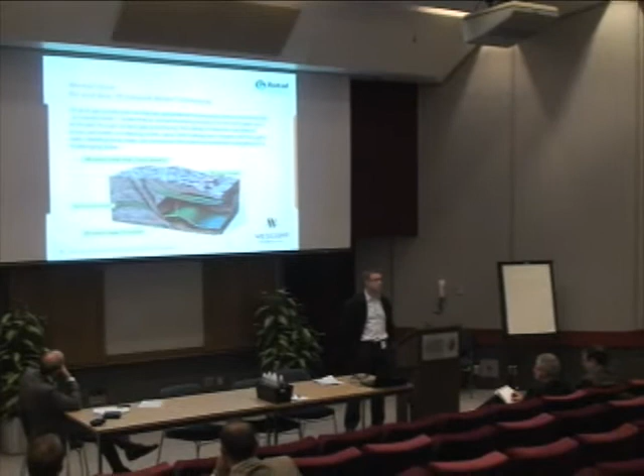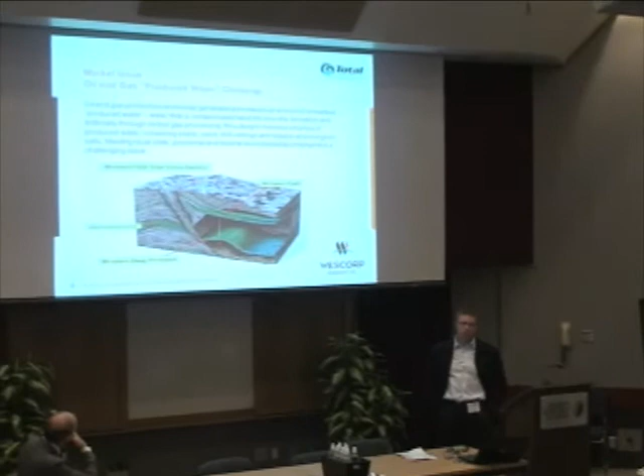So, I'll just go here. The market that we're going after, Wescorp's, this company is called Total Fluid Solutions. We acquired the patent for this technology. It's a mechanical process; it'll be 2 years in December. And what it's focused on is to help solve some of the problems in the produced water market. The produced water market is larger than the oil market itself. Many of the oil companies out there see themselves really as water producers versus oil producers. And wherever there is oil or gas, there's water. The byproduct's called produced water.

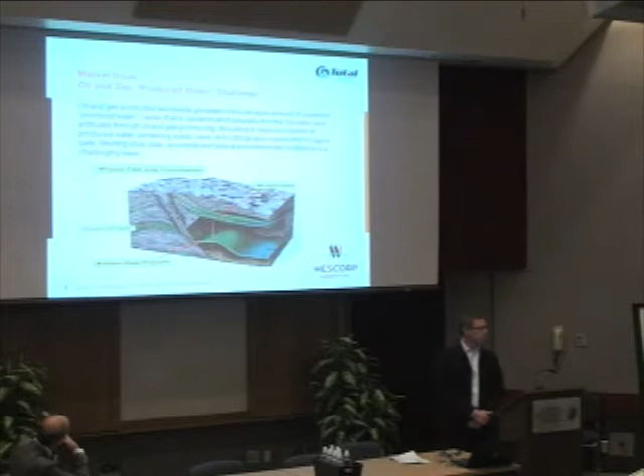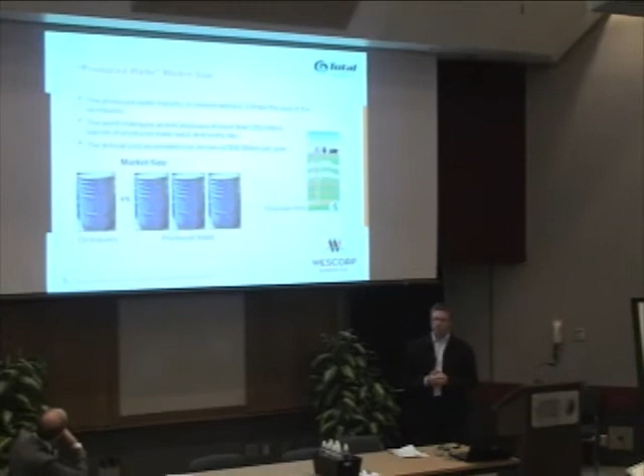And David, you would know that from up in being from Syncrude. Size of the market is 3 times the size. Currently, the world produces and consumes about 90 million barrels of oil a day, and it produces in excess of 250 million barrels of produced water. So it's a very, very, very large market.

And in that market, there's very large competitors, companies like Zenon and Siemens. You've got Veolia. There's lots of different players in the market today, and there's a variety of different technologies in the market today to help the producers deal with their produced water market. We believe that we have a technology that we have proven in the market. We've worked with the Alberta Research Council. We've worked with University of Calgary. We've worked with Olds College. We've worked with PTAC. And we have proven our patented technology to work in helping to remove hydrocarbons from the produced water.

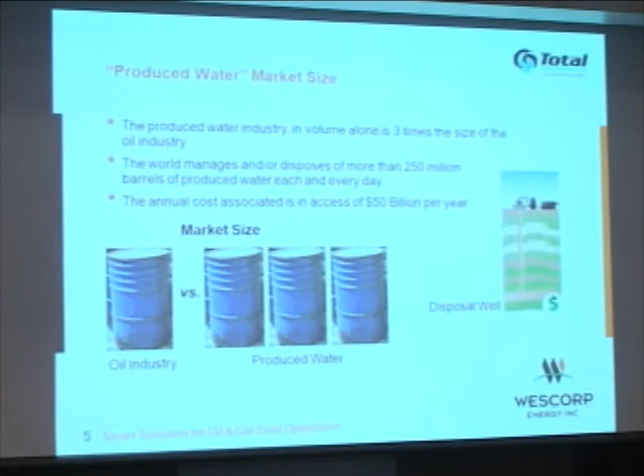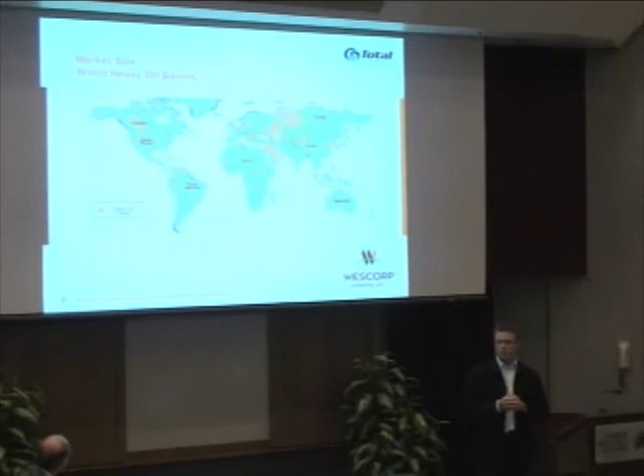Again, the size of the market, it's global. Wherever there's oil, there's water. It doesn't make a difference where you're producing, whether it's shallow or deep, on land, off land, offshore, there's always water to deal with.

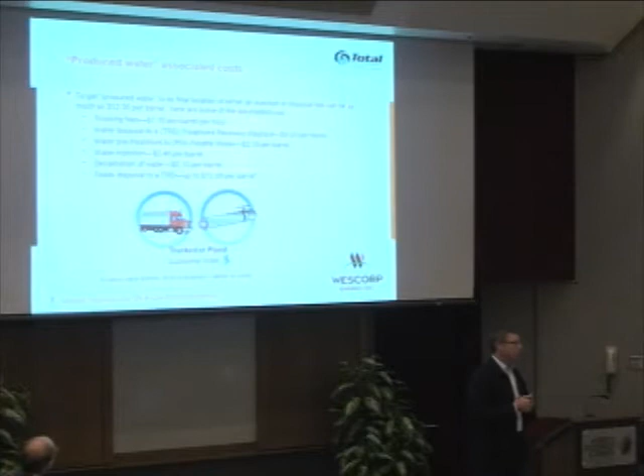Why are we in the market? We think that there's huge opportunities for us to help cut some of the operational expenses in the market itself. And many producers will tell you on average that they could spend as high as $12 per barrel of oil to deal with their produced water. Produced water is in the formation. It's typically very heavily saline, 3 to 4 times, maybe even 10 times more saline than seawater.

And those producers have really got 2 options to deal with that water. They can either dispose of it down a disposal well, many of you have heard of a disposal well, or they take that water and re-inject it back into the formation and re-stimulate oil or gas production. On an offshore application, there's government regulations. If they can get the water down to specific parts per million, they can discharge that water into the open sea. But in most cases, they're actually processing or transporting that water to land and processing the water on land.

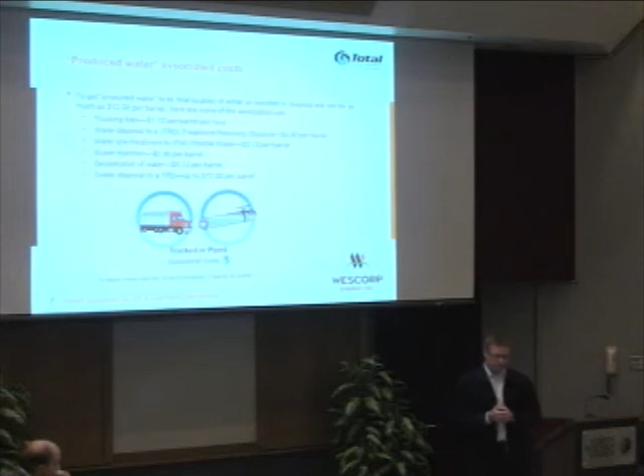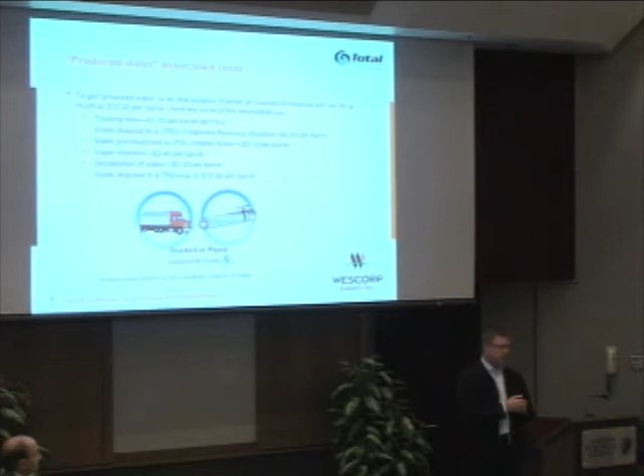Huge market, huge, huge market. The points in here speak a little bit about some of the costs that are associated with the produced water market itself. The very last one is called treatment, recovery, disposal. That's a third-party waste company. Some small producers end up having to take their water to a third-party handler, and the cost can be extremely high in that area. So what do we do?

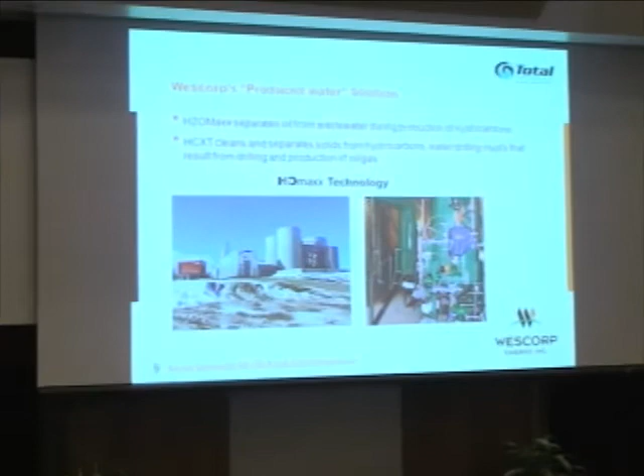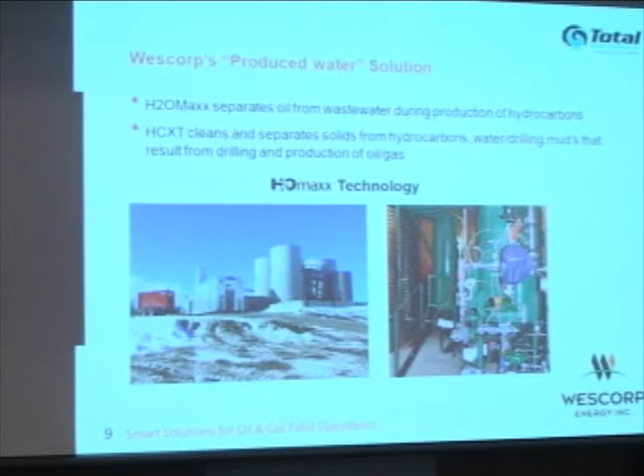The picture on the left is a beautiful Canadian winter shot. That's actually our unit, the silver building there, that's our unit. We have a mechanical process that is fully scalable, it's patented, it's a patent process. And that is actually at a site just west of the city of Edmonton here at an EOG facility. Just actually Highvale is where it was. And that facility had 120 well production facilities.

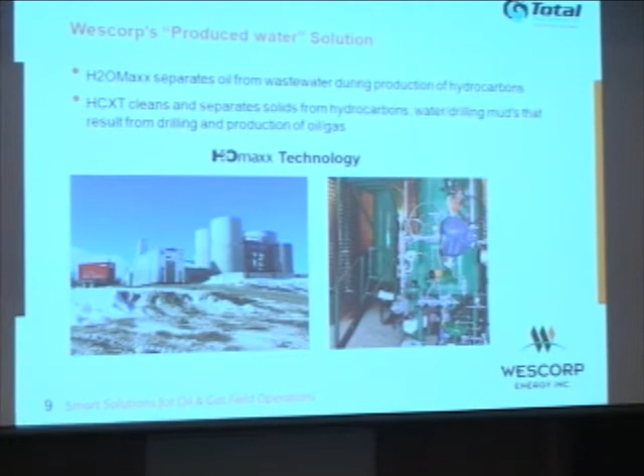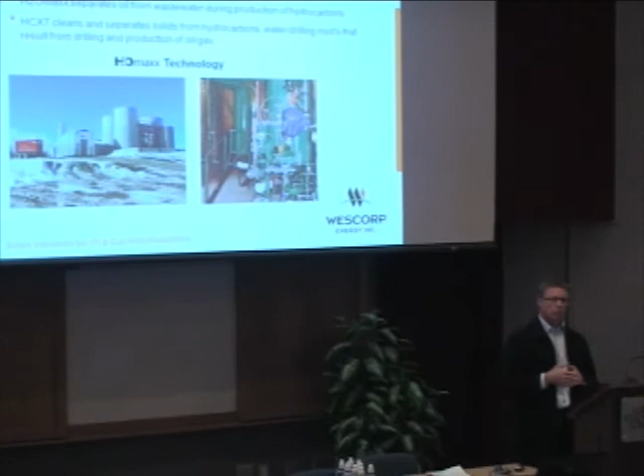Plant was about 30 years old, and we were taking the water stream from those silver tanks, which they would normally take that water. They had a free water knockout system. They would put the water, retain it in the tanks, and then inject it down the disposal wells, and they were running into a high degree of costs associated with disposing of that water.

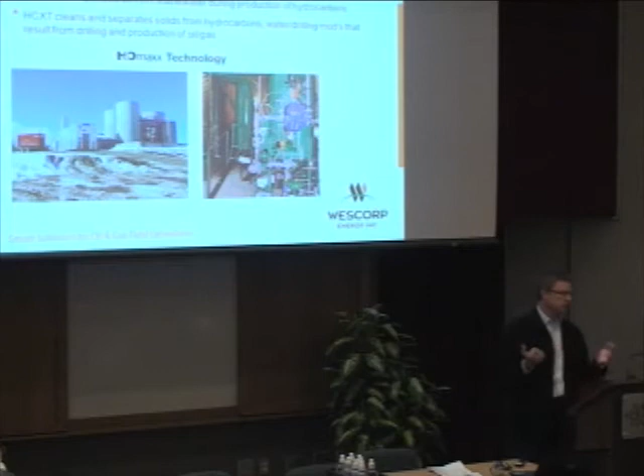That came in the form of power consumption by driving bigger triplex pumps to force the fluid down. It came in the operational costs, labor components. They used filtration, down to 2, 3, or 400 micron filters, and they were continually having to change the filters. So it's a cost issue for that specific producer.

The other side is you may have heard of well workovers or frac jobs in the oil industry. A well workover is taking a disposal well that's actually now clogged and sending in a workover crew to come in and acidize or clean that well out so it can now take more fluid. Those costs could be $50,000, $60,000 per service incident to do a well workover. And it could happen annually, it could happen biannually.

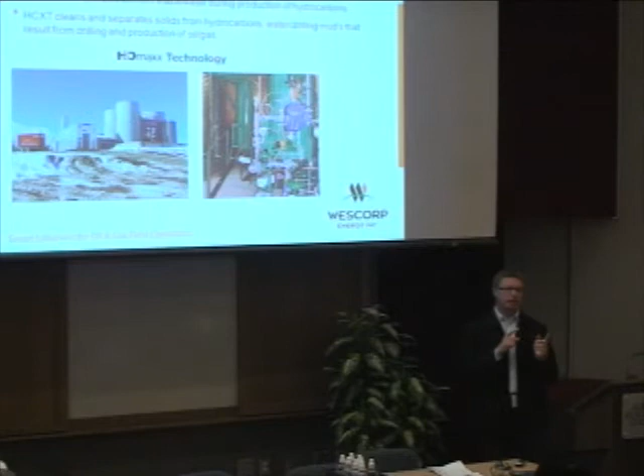But the key is that what we do is we provide the producer with water that is hydrocarbon free. If you take the analogy of salad dressing, which is oil and vinegar, and you pour it down your drain at home continually, eventually you're going to end up calling in the plumber to clean out your drain. Principally that's what happens when the producer puts his produced water back into the formation laden with hydrocarbons. He creates a clogging effect in the wellbore, and a lack of production in his formation itself. So that's what we do.

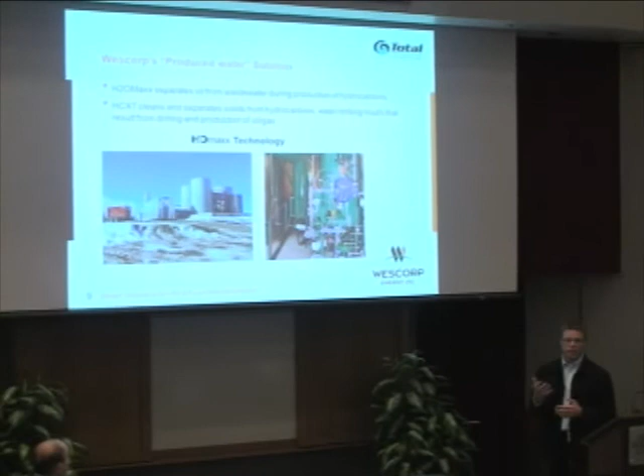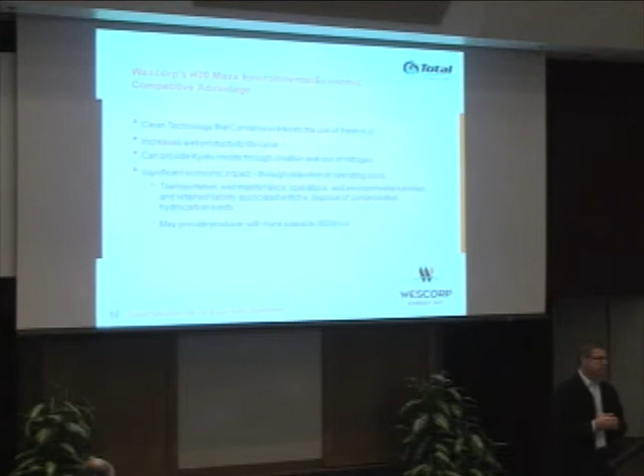The unit is scalable, and the picture on the right here is showing the inner workings of it. It's a mechanical process. We achieve the separation through using nano or micro technology, through creating a micronic bubble in the fluid stream. So principally, the science creates the separation. The technology can be very massive.

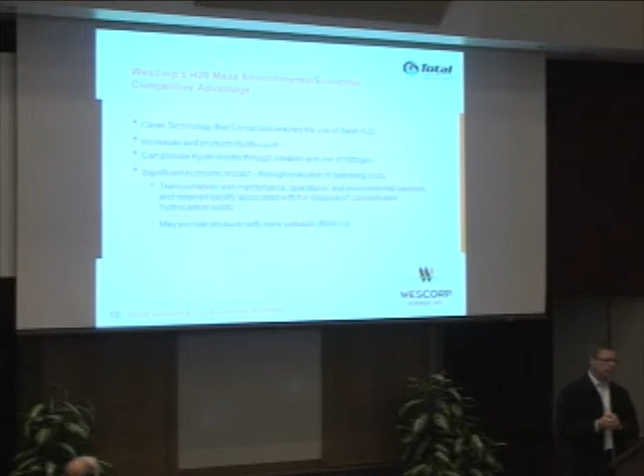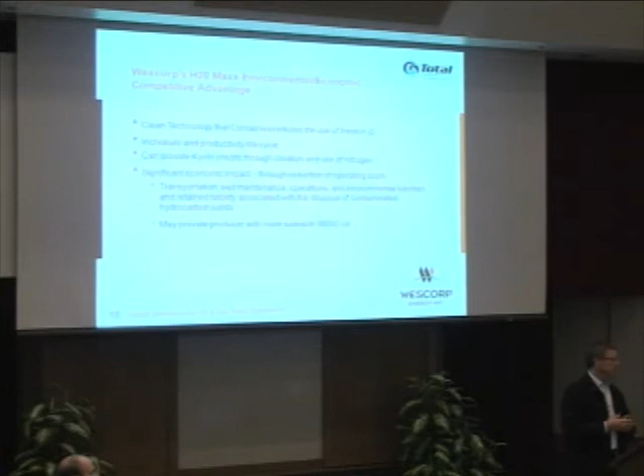I met last week with the people in Calgary at Apache. They were telling me about a situation they have in the North Sea where they're producing 80,000 barrels of oil off 4 production facilities, and they're producing 800,000 barrels of water. So their cost, just even to process the water, is massive. And so they were asking us how does our process work?

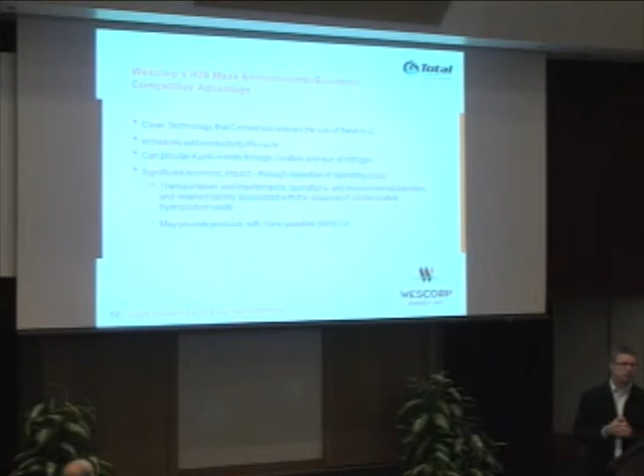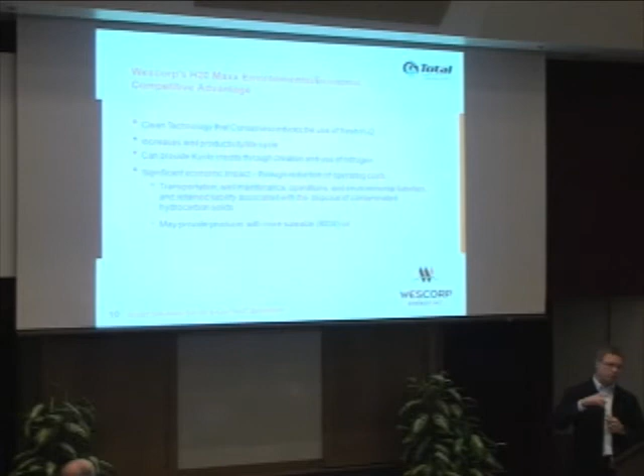We create the separation through using a distributed airflow, a micronic bubble in our technology, and a centrifugal approach. So basically, we introduce the fluid into the tank, we spin it, we add a distributed airflow, and the small micronic bubble attaches to the oil droplet in the fluid and creates it to lift, creating a separation. We also can separate solids, sediments, and silts as well in our process, up to a certain degree.

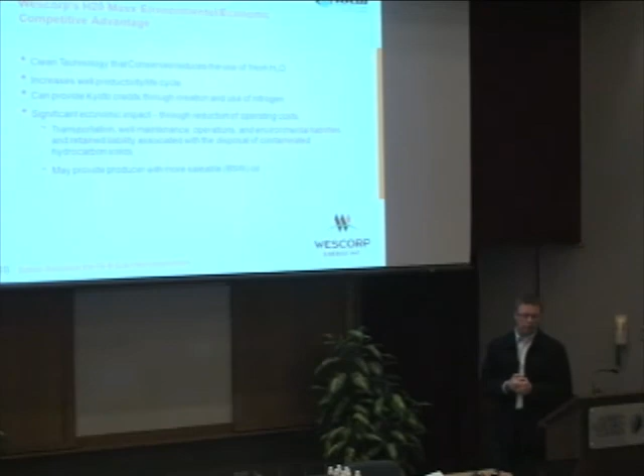So we think the market, we're going after the produced water market, is even larger than where we want to go. And again, we're a very new company, and we wanted to target one specific area where we could be successful. So the advantages are, obviously, the producer can actually reuse that water for well stimulation.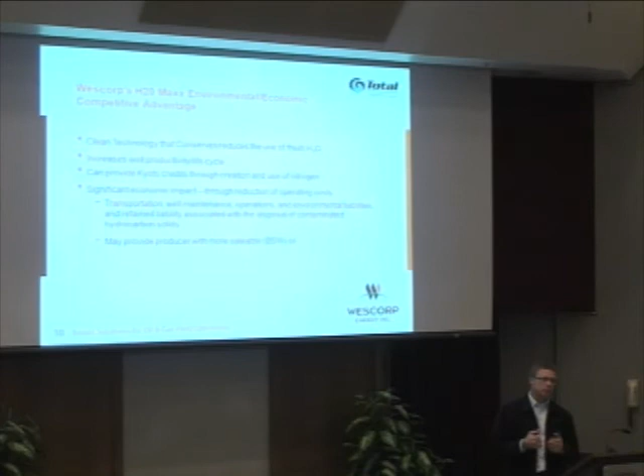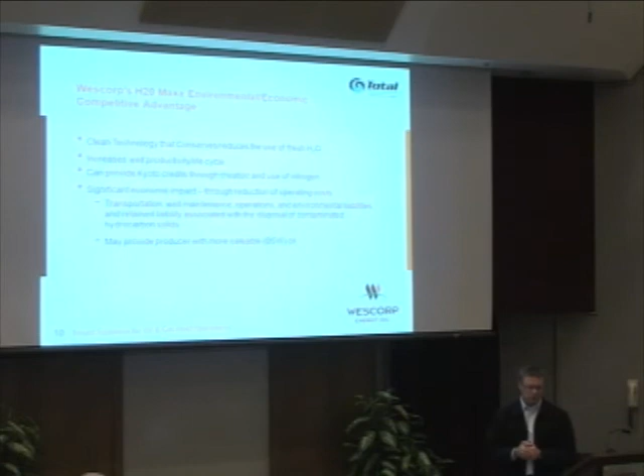They can increase the well life, and we've heard this from the geologist side of the business. If you're putting cleaner fluids into the formation, you're going to increase the life cycle of the formation itself. And many of you are aware that there's a lot of oil still suspended in formations out there today. We can help them recover some of those oils. The biggest thing that we focus on is the operational savings.

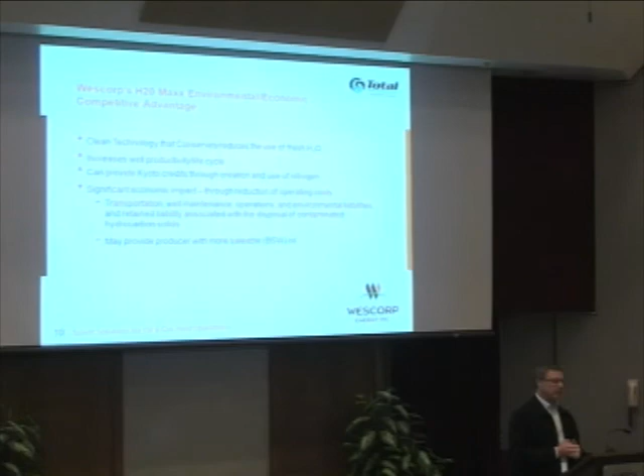And I've been educated that wells are like children. They're all uniquely different. There are no 2 wells that are exactly the same. So we look at the characteristics of the well or the formation, work with the geologists and engineers, and design our specific technologies to fit within the plant that they have. But our main focus is to help cut down on the operation expenses. And in some cases, we've been able to provide a recoverable oil.

We're working out by the Lloydminster area, and in those specific instances, the water the customer was putting into their formation, we were saving them 20 to 30 barrels of oil production per day. So they got an increase in their production levels. So it varies to who you are and where you're at.